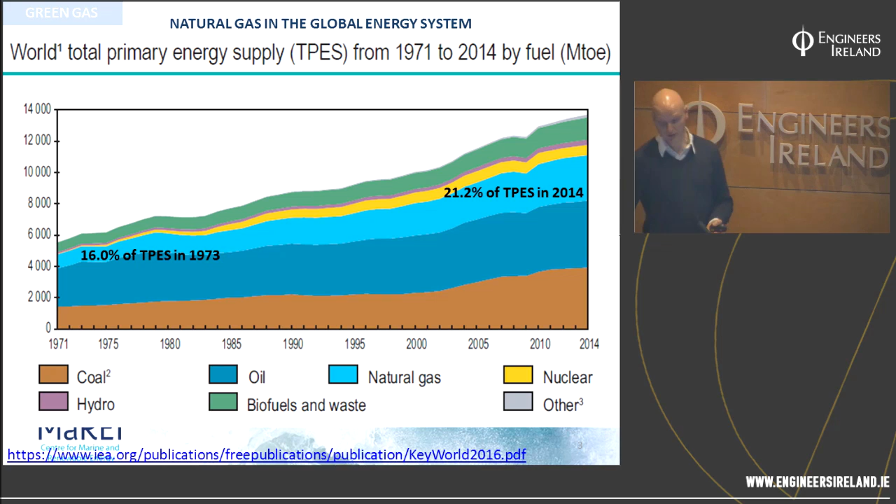So on a very basic level, this is the world's fuel mix, looking at the primary energy supply. We don't see electricity in this - what we see is the fuel that goes towards running the economy from the early 70s to recent times. I've highlighted light blue here, which is the role of natural gas. It's a little bit over a fifth of the energy used globally, and it's projected to increase for a few reasons, which I'll go into.

This is another, maybe more complex but very data-rich, way of looking at the energy system. This is a Sankey diagram produced by the International Energy Agency, the energy research division of the OECD, and it shows on the left side the primary fuels that go into the world's energy system, and what those fuels are used for on the right hand side. It gives a really nice way of visualizing what fuels go where.

One broad brushstroke we can take from this is that a large portion of the world's coal goes towards power generation. If we look at coal here, this is all the world's power plants, and this is what that power gets used for - coal is the number one power generation fuel. Another broad brushstroke is that most of the world's oil, the major portion, goes towards transportation. So it's a nice way of visualizing where natural gas fits into this.

Well, natural gas is the blue line here in the middle.

This is not saying that planet Earth imports natural gas—obviously that's not the case. This is just looking at the breakdown between gas that's produced and consumed within one country, compared to gas that is internationally traded.

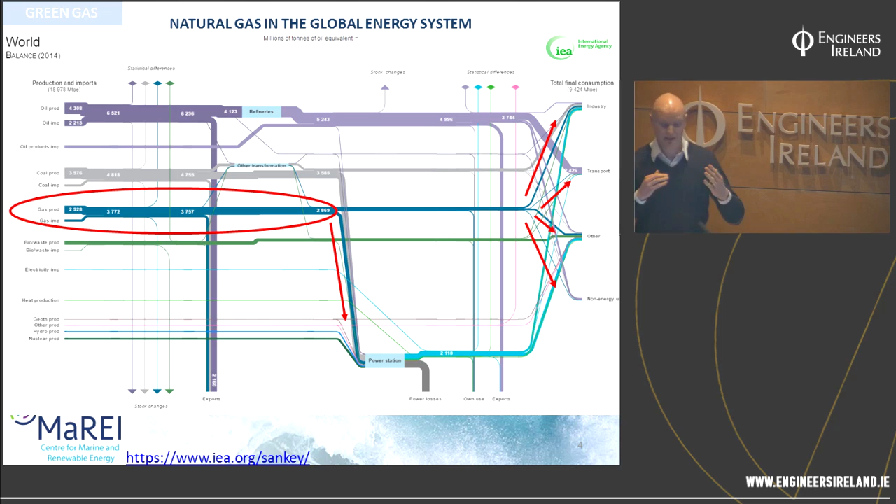And another 40% goes on transportation. So I'd like to differentiate between electrical energy and total energy, and that will come through in my presentation later on.

There has been an increasing use of gas in recent years for a number of reasons. It's increasingly being seen as a low carbon alternative with respect to coal.

Combined cycle power plants, CCGTs, are relatively cheap to build. They're still a large investment, but more of the cost of electricity of a CCGT comes from the fuel than from the building of it, so you can get them built quite reasonably cheaply.

There's been an increase in the diversity of supply of natural gas, which has brought the cost down significantly in the last number of years.

The two main drivers talked about worldwide are the exploitation of shale gas and the increasing use of LNG. In Europe we haven't really embraced shale gas to a large extent.

But there is a large increase in the amount of LNG, or the portion of gas traded that is made up of LNG.

On the technical, engineering side, there is a good complement between natural gas and wind. Gas-based power plants can be operated in certain ways.

They can pick up capacity that may be shed by intermittent renewables, so gas and renewables are seen as being good partners in an electricity system.

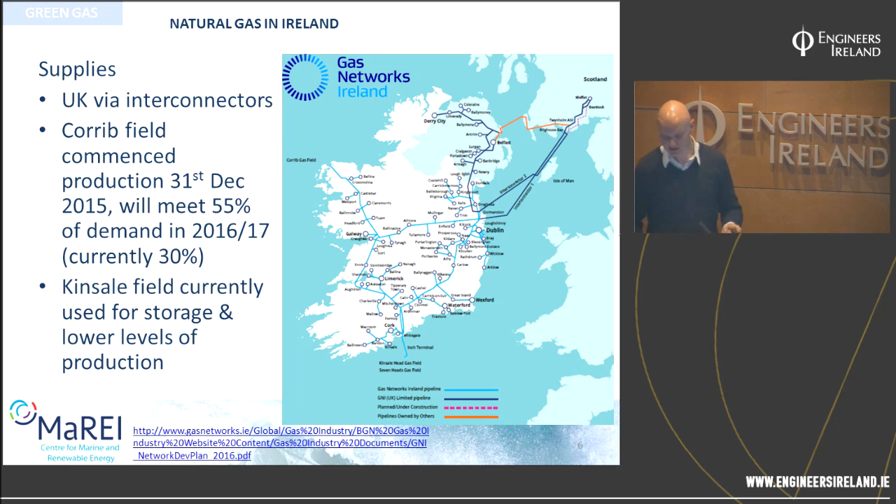It has been used for gas storage over the last number of years, but its use is being wound down now.

How gas is transmitted from the supply side to the demand side is via a transmission and distribution network—very similar terminology to what's used on the electricity network, except instead of voltages, we talk about pressures. There's 2,500 kilometers of high pressure system and about 11,000 kilometers of low pressure systems.

And then once we get into built-up areas, that pressure is reduced down to close to atmospheric pressure.

Another interesting feature, which will be relevant when I talk about projects being funded by the Gas Innovation Group, is the presence of about 50 AGIs.

These are above ground installations, access points into the natural gas network. They'll be particularly of interest for those looking to feed into the network when we start talking about renewable supplies of natural gas.

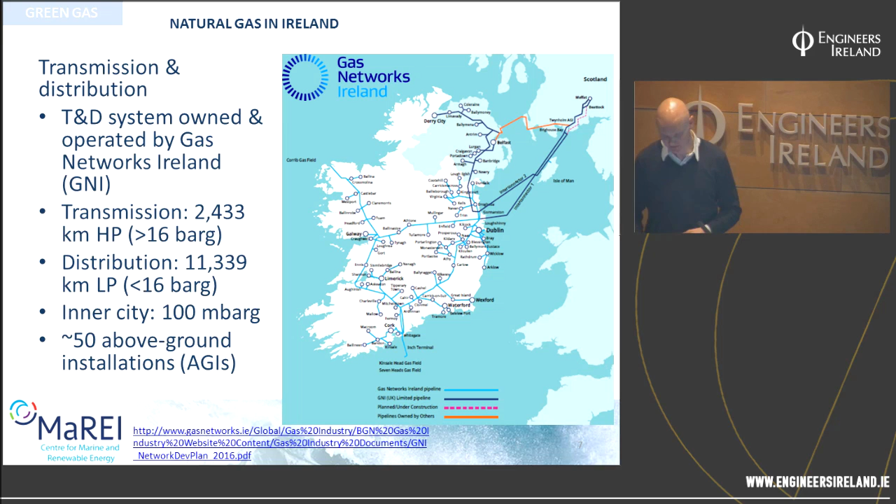On the demand side, world figures show about 21% of primary energy coming from natural gas. In Ireland, we're a little bit more fond of natural gas—it's about 27%.

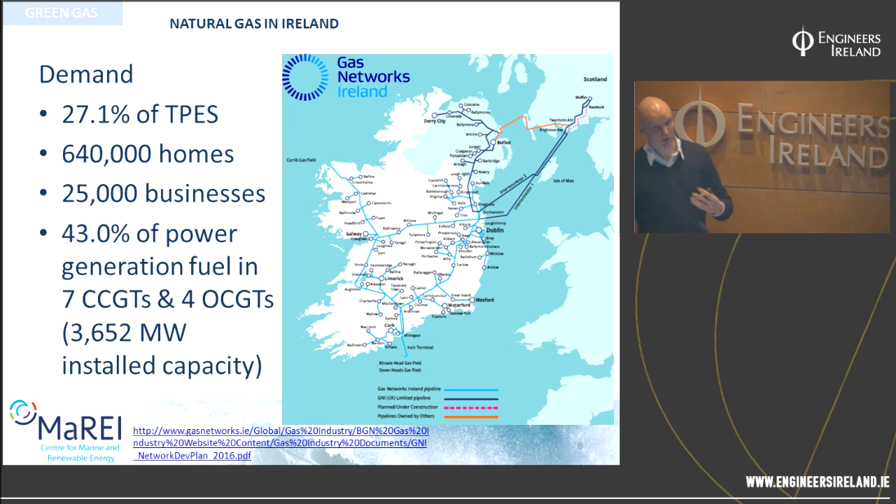640,000 homes, 25,000 businesses - it is the major contributor to power generation in Ireland. This is the installed capacity of natural gas based generation, though this is not operating all the time. There are some open cycle plants which do not have large run hours, but on an energy basis, 43% of

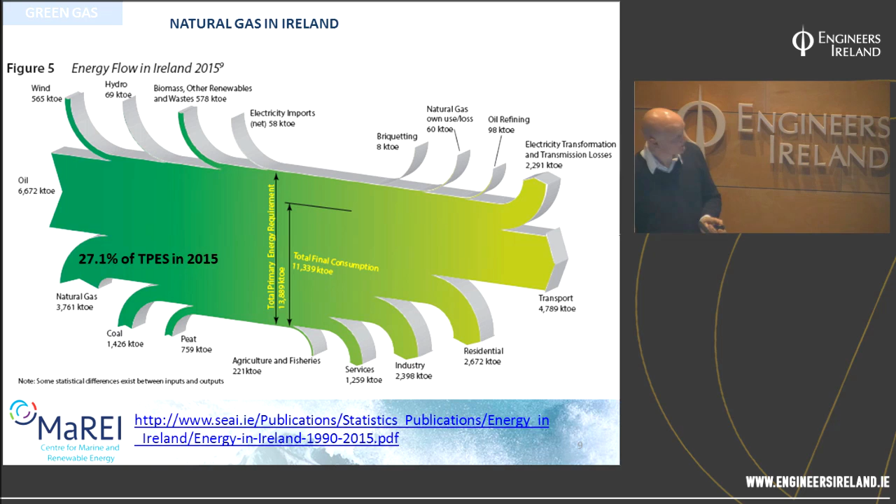the fuel going into power generation is natural gas. This is how gas fits in the overall Irish energy system. There's that 27% of all our resources that come in, so only oil is a bigger contributor. And the Sankey diagram for Ireland shows gas's role in being the major power generation fuel.

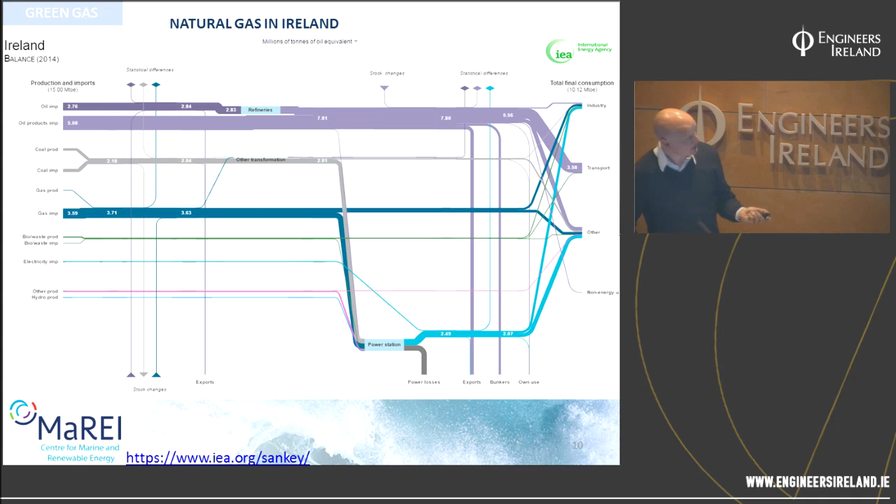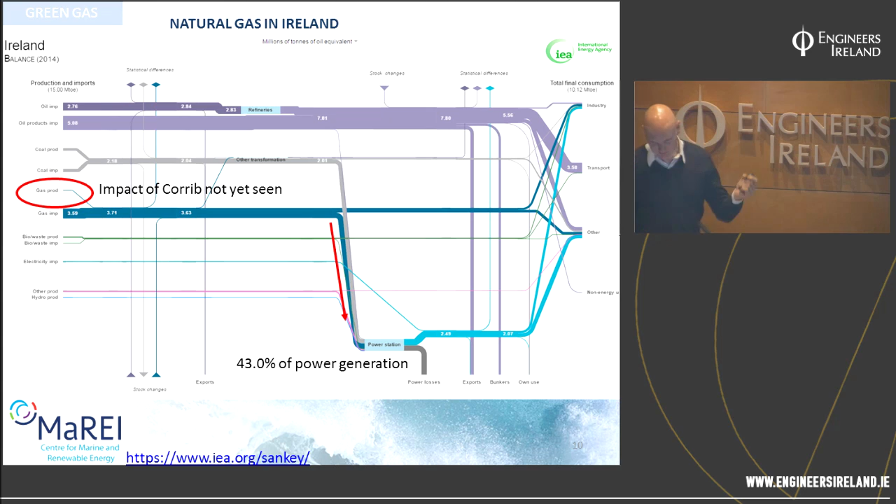In Ireland, we don't currently use any natural gas for transportation, but we're using natural gas across other areas. Sorry, we do use natural gas for transportation in very, very small quantities, but it's not reflected here in this figure.

Those of you who follow the news might have seen about 3 weeks ago that Gas Networks Ireland (GNI) announced plans for a large-scale compressed natural gas filling station network. I thought I'd mention this now, and it will maybe give context to some of the things I'll be talking about later. The overall target is that 20,000 heavy goods vehicles and 12,000 buses will be converted to compressed natural gas.

Now, why would people want to convert to a gas fuel from a liquid fuel? Well, there are a number of reasons. Price volatility is more significant for oil products than it is for natural gas. There's been a significant decoupling in recent years of the cost of natural gas from the cost of oil, which were always traditionally linked. But there are less emissions.

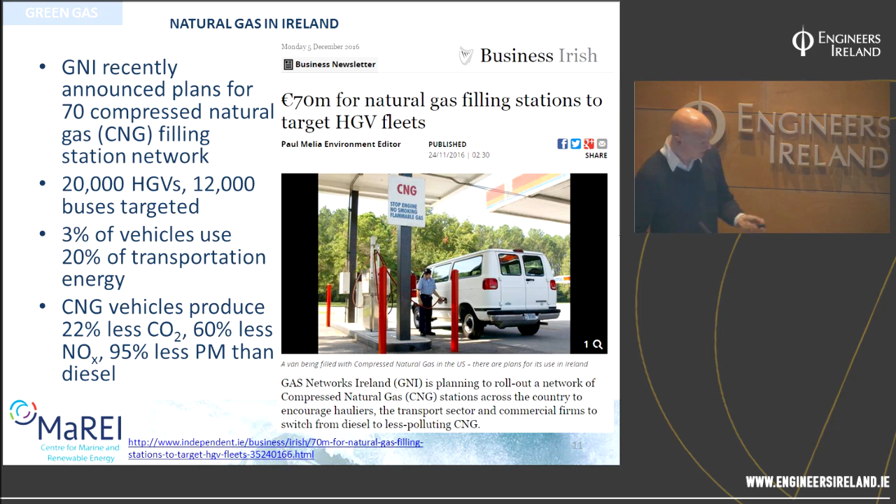There's lower emissions, so maybe not as much of a drop in CO2 as some people may expect, but there are significantly less atmospheric pollutants that do harm to human health associated with natural gas compared to diesel. NOx are smog-forming and respiratory-attacking pollutants, and PM is particulate emissions. You can almost eliminate particulate emissions by using natural gas.

In order to address a number of challenges facing the natural gas network, the CER set up an organisation called the Gas Innovation Group, which is chaired by Gas Networks Ireland. Some of the challenges facing the natural gas suppliers was that even though a large amount of natural gas is being used to provide fuel for the electricity system, an increase in renewables has actually caused a slight decrease in the demand for natural gas in recent years.

Gas Networks Ireland, being in the business of transmitting gas, is interested in finding ways to address that. There's the emissions reduction issue - we don't really use natural gas for transportation in Ireland now, and we can see that there are major environmental benefits of shifting from some of the dirtier fossil fuels to natural gas, which would be the cleanest fossil fuel.

It also matches well with renewable energy on two fronts. It's a good complement to existing renewable electricity sources, but the natural gas grid can also be a delivery system for renewable energy through technologies such as anaerobic digestion, where you can produce methane from a renewable source and inject it directly into the grid. This would be a way of making progress towards some of our renewable energy targets, which I'll show later on.

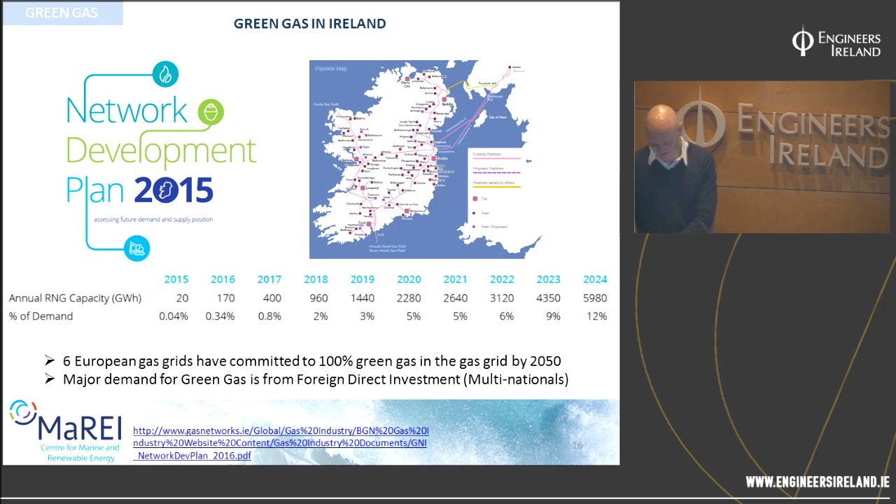So it's data centers—they've got heating, cooling, and power requirements. Gas Networks Ireland are very much interested in trying to get organisations like Apple, and types of sites like data centres, on board and pushing the demand for renewable gas. There are other examples I could go into, but certainly for the west of Ireland, Athenry is the focus. Now, there are other reasons why this site's development is being held up—it's not only the renewables, but that's a different story, and not just an engineering issue.

In terms of why people would use the gas grid as a delivery system for renewable energy, I'd like to present some rough numbers produced by Jerry Murphy in UCC, in a piece he wrote for the Engineers Journal last year. If we break down energy use very roughly into electricity, heating, and transport, you see this 20-40-40 breakdown roughly.

In order to reach our European 2020 targets, known as the 20-20-20 targets, the European Union as a whole has to have 20% of its energy coming from renewable resources by 2020, reduce carbon emissions by 20%, and increase energy efficiency above a baseline by 20%. So that's called the 20-20-20.

Ireland's specific target within that European target is 16% renewable energy by 2020. This is the breakdown Ireland has chosen to pursue: 40% renewables in the electricity sector, and 12 and 10 in the heat and transport sectors. This is how they play out in the overall energy mix.

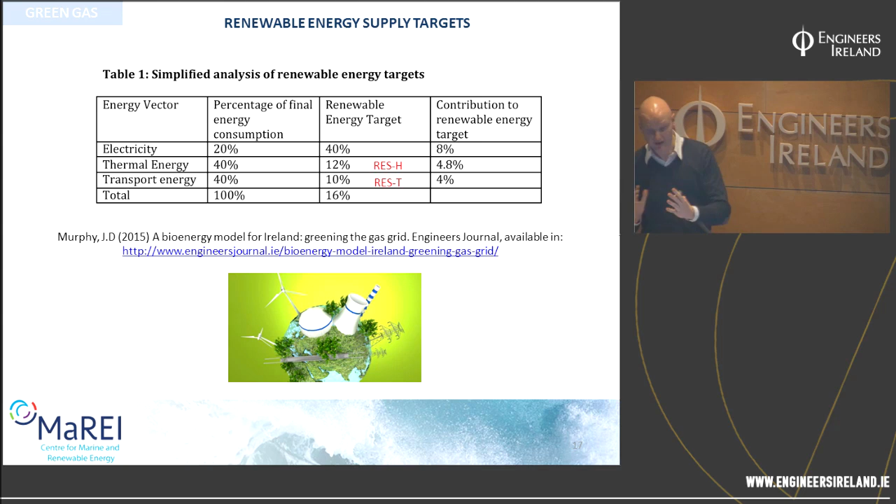So we see the gas grid as being a potential way to do that.

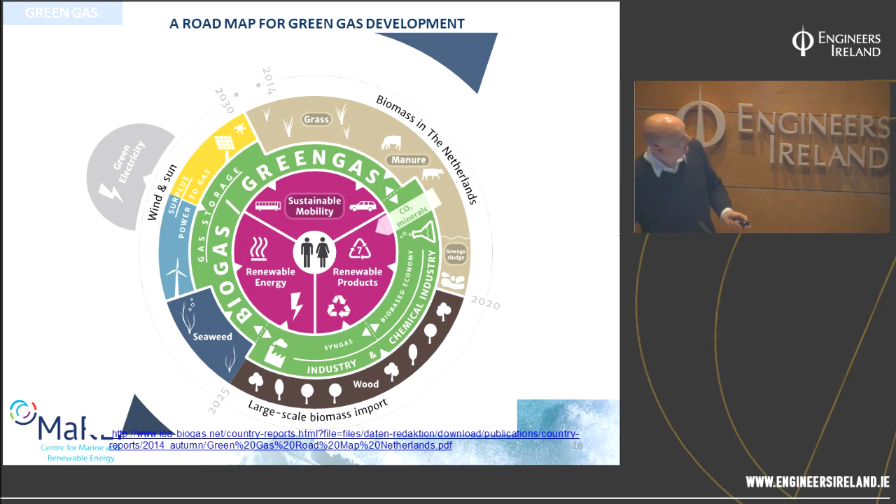Now, this is quite busy, but I'll try to explain it. This has been produced by the International Energy Agency for the Netherlands, who are one of the leaders in the use of renewable natural gas, or green gas. This shows, starting now basically, what technologies and resources can be used practically to provide renewable methane onto the gas grid.

So anaerobic digestion processes that use grass or manures are well-established technologies, and with the right incentives they can start supplying gas to the grid now, and in many cases they already are. Germany and Denmark have large portions of anaerobic digestion on their grids.

Going then, sewage sludge is maybe more of a topic currently under investigation. It's being done at some wastewater treatment plants, where energy is recovered, but it's not being injected into the natural gas network—it's being used to generate power on site.

Going into the future, into these more emerging technologies, we're looking at using harder to break down feedstocks—harder, woodier, more contaminated feedstocks, which would not be suitable for anaerobic digestion, a biological process. These would be more suitable to something like gasification, a process not a million miles away from combustion in terms of the conditions encountered.

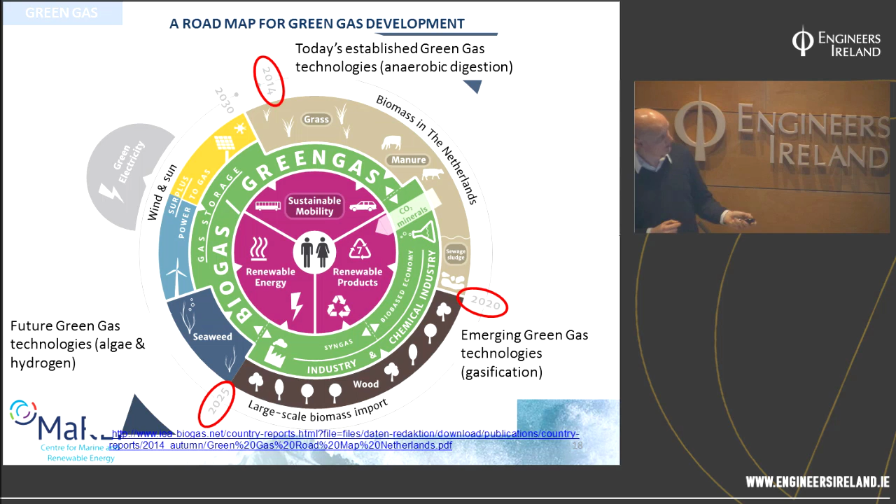We can start to imagine a system where you have the natural gas grid and the electricity grid combined through the use of hydrogen, using that hydrogen to produce renewable methane. I've got a schematic of what such a system might look like later on. But anaerobic digestion is a more well-developed technology for biomethane production than gasification. So let's look at what some of these technologies are.

Essentially, anaerobic digestion is taking a wet biomaterial, a substrate, and adding what I'll call bugs to it, left in an oxygen-deficient environment. What happens is a breakdown of that biological material into a series of gases. One of the key steps is the conversion of volatile fatty acids into methane.

That methane comes out as a mixture of 50-50 methane and carbon dioxide, with a little bit of cleaning up. That can be injected into the gas grid, or used as a vehicle fuel.

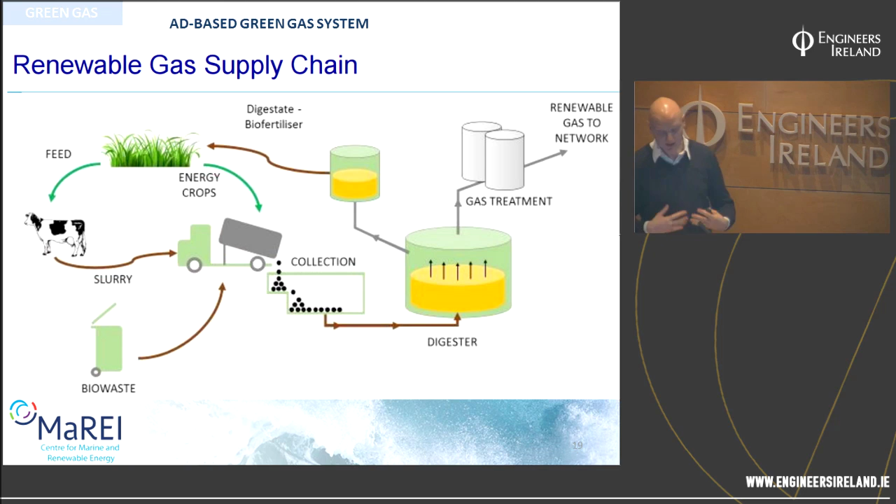The other thing that comes out of it is digestate, a solid material which, depending on the feedstock originally put in, can be used for fertilizer or soil improvement. So it's a way of closing some of the loops within the agricultural sector.

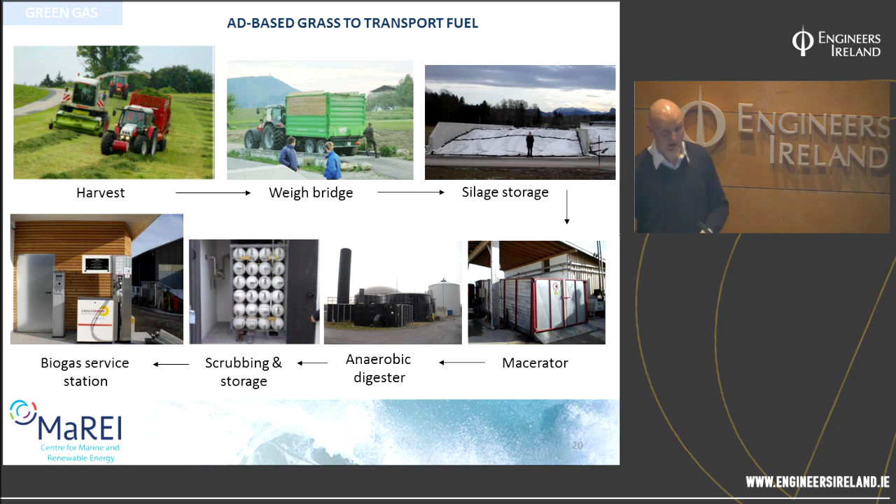This is an example of a grass-based anaerobic digestion fuel production system in Austria. This is not funded by the Gas Innovation Group, but it's an indication of what is possible with anaerobic digestion. We have the harvesting, the digestion, storage, the cleaning and storage, and then eventually this is used to run some of the local transportation systems. So it's a nice closed loop.

What the Gas Innovation Group has been funding is performing resource studies in Ireland. This is work performed within MaREI, specifically at UCC, where the spatially resolved resource for a large number of feedstocks suitable for anaerobic digestion can be studied.

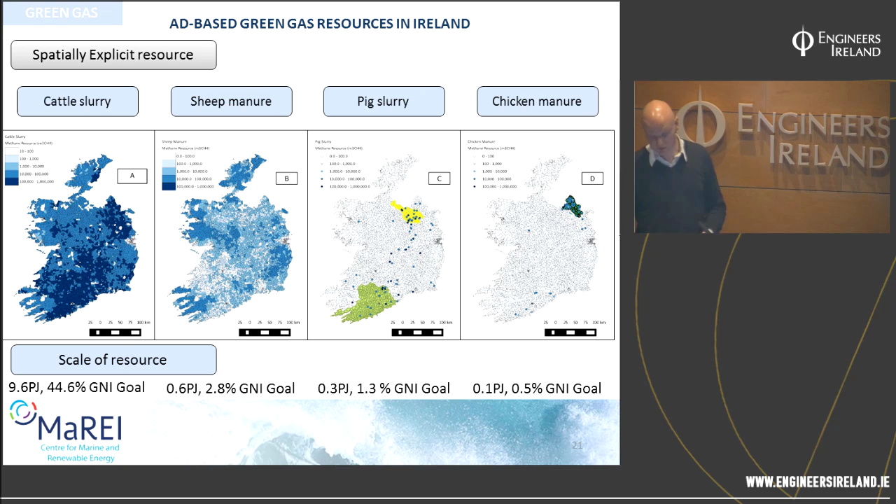Now, you're never going to get all of that slurry because a lot of it is on the field. It's not practical to get. Some of it's going to be too far from the gas grid. But this gives a first indication of how much of that resource there is. This work was funded to look at a number of other feedstocks as well, which you can see there, and some further studies done here.

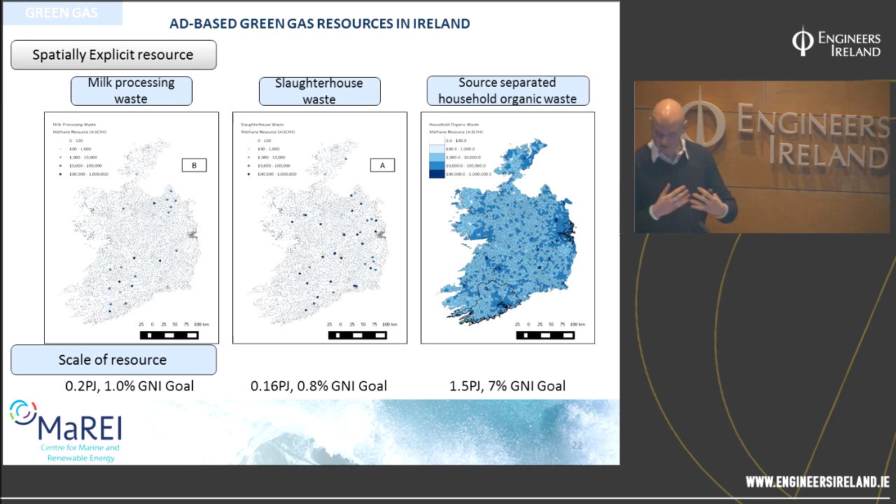Another interesting one here is looking at household separated organic waste, which I'll look at in a little more detail. This one is interesting because where you have houses, you have organic waste, and where you have houses, you have energy demand. So there's potentially a good link between those two.

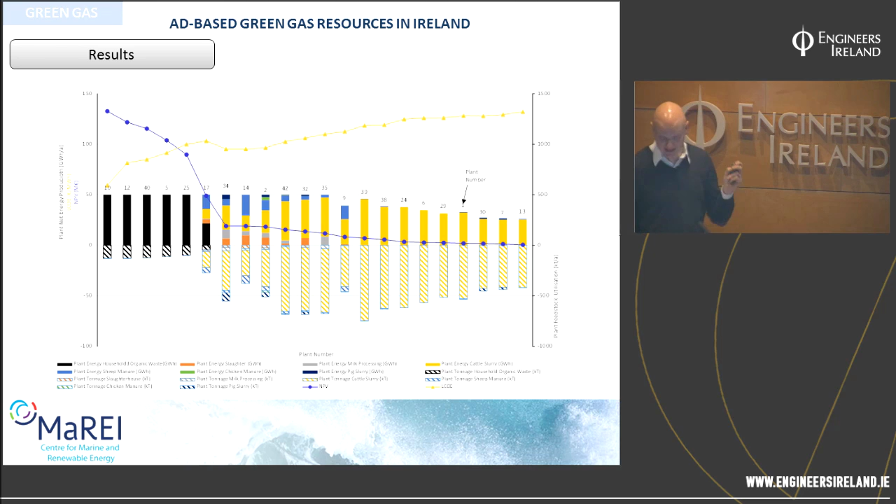The first sites on the left have the highest net present value, the most potentially profitable sites. They're all operated using household waste. As we get into the lower net present value ones, this is looking at more slurries and grasses. But the first ones are sites that use organic waste, and they've got a high net present value according to the study. Most of them are based in the greater Dublin region, which makes sense—there's good agricultural land outside Dublin and high energy demand inside Dublin.

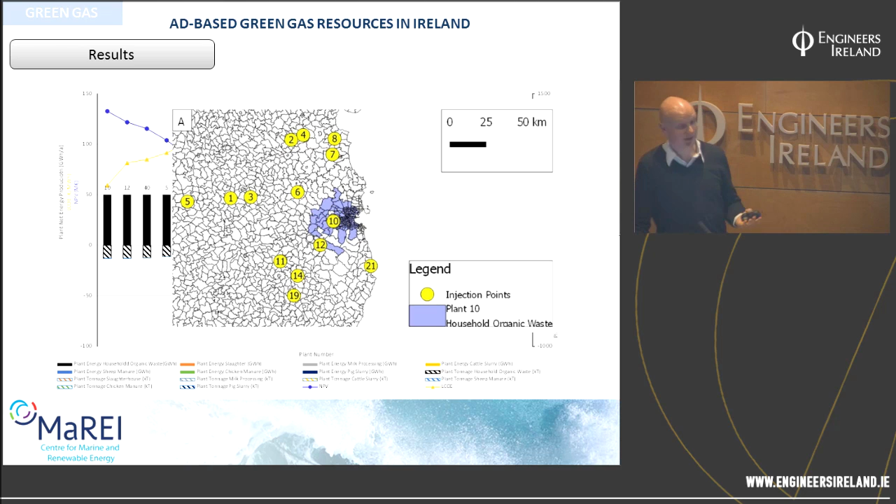So this is where the work is at with the anaerobic digestion resource studies, looking at different types of feedstocks. Feedstocks that would not be suitable for anaerobic digestion, which don't have the high moisture content required, are better suited for gasification. This is work that I'm leading in Galway.

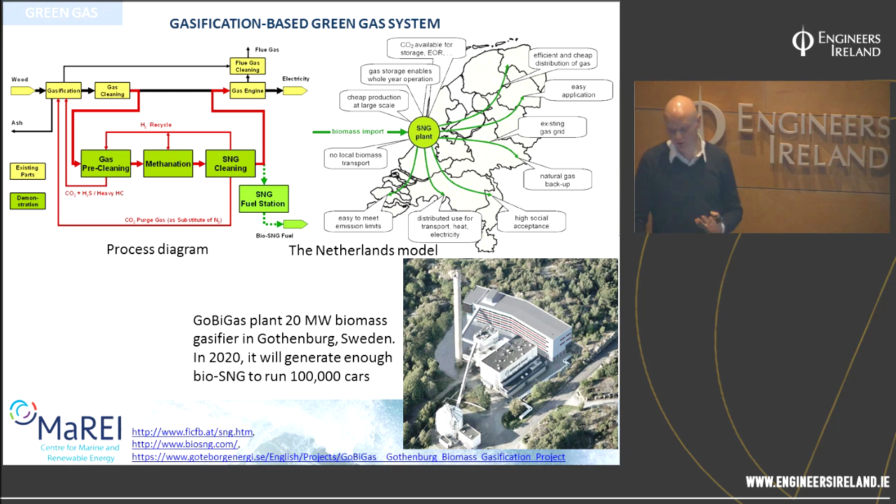Now, Sweden is a very heavily forested country, and wood is the ideal source of fuel for a gasifier. We don't have as much wood in Ireland, so we started doing a similar study looking at what types of resource we have available in Ireland.

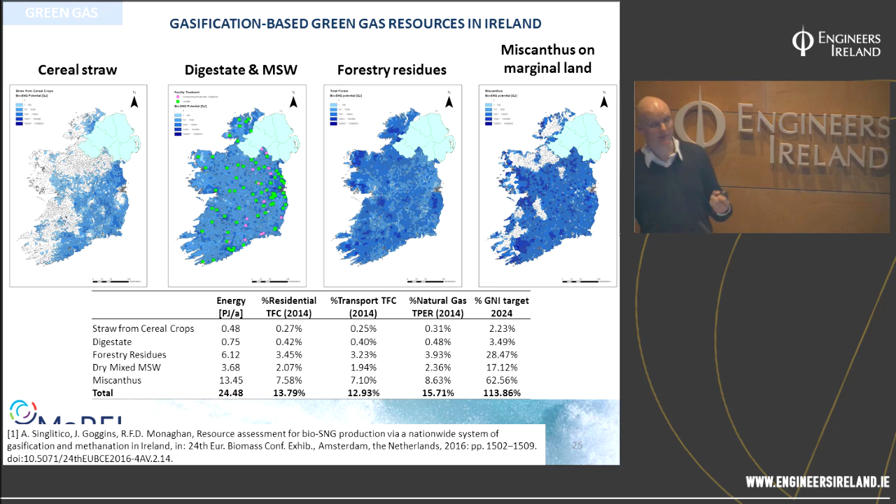And the resources we looked at were cereal straw, leftovers, looking at the outputs of digestate that would not be suitable for spreading on land, and the black bin waste, residues from forestry, from Coillte, from private forests, and looking as well at the use of low-value agricultural land, so what's called marginal land. Now that's a difficult definition to pin down, but you can grow energy crops such as miscanthus on low-value land without really offsetting too much agricultural activity that's going on. So when we sum all these up, we can make some comparisons to the Gas Networks Ireland 2024 targets, and we can see that some of these do start to make significant dents into that target value.

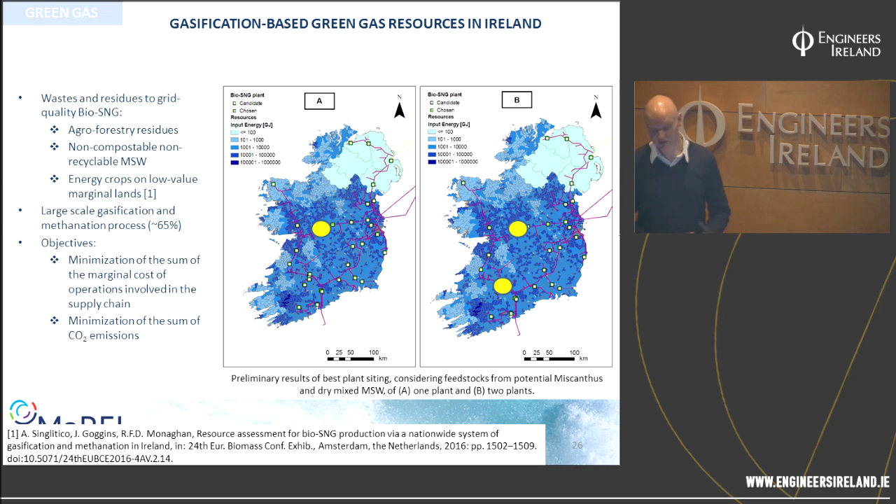So what the current state of this research is now looking at is where are the optimal locations for these gasification sites. A lot of the gasification resource would be in areas that are not particularly near a natural gas connection. So how do we design a system that gets the raw resource to the gas grid, and how do we do that in the most efficient and most environmentally sensible way.

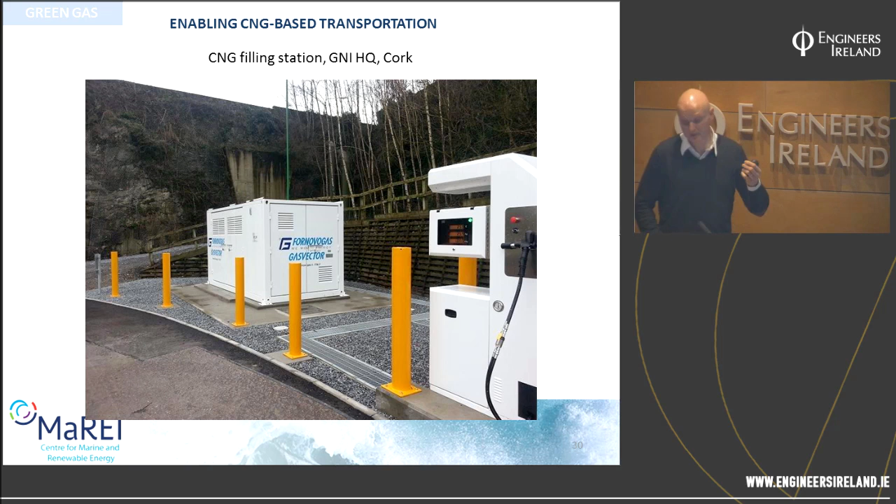This was also funded by the Gas Innovation Group, and the idea is that these will form the backbone of this conversion to natural gas fueled transportation.

There's a groundbreaking at the Clean Ireland recycling facility in County Clare, where they're putting in a fast fill CNG station. There's fast fill and slow fill, much like with electric vehicle charging. Fast fill, you'll fill your tank in 5 or so minutes; slow fill, maybe 3 to 5 hours. So there'll be a fast fill one going in here in County Clare.

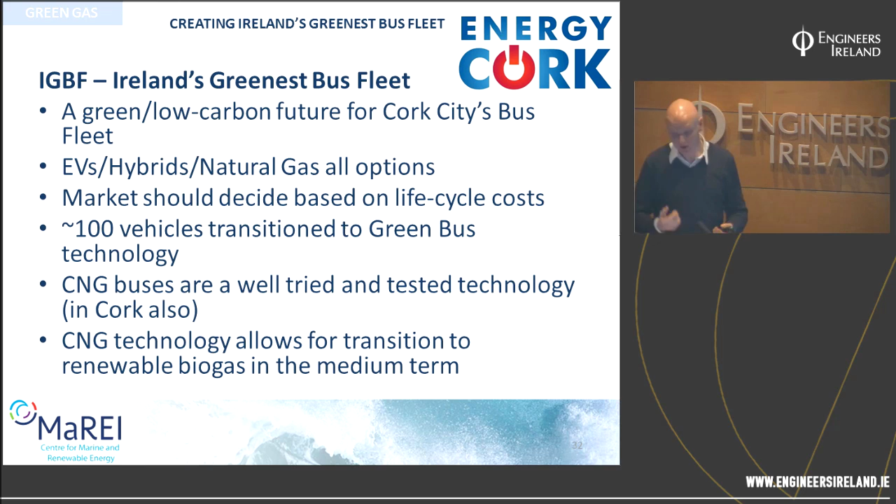So what the Gas Innovation Group helped fund was a temporary CNG filling station at the Capwell depot in Cork, and there's currently investigations ongoing to put in a fast fill permanent station at the same site that would enable a constant presence for natural gas fueled transportation in Cork. But in terms of using gas for public transportation, this is the most developed project ongoing in Ireland at the moment.

And what all of this is building up to is this Causeway project. Gas Networks Ireland was recently awarded funding from the European Infrastructural Network Fund to commence the first stage of this nationwide CNG filling station network. The initial plan is to have 14 filling stations along the key motorway routes from Dublin to the border, Dublin-Limerick, and Dublin-Cork.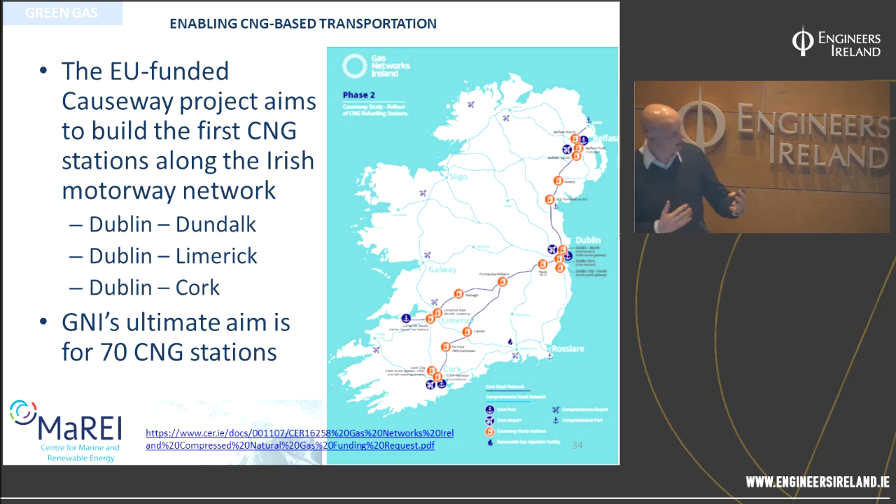This is being funded, and there's also a research element to this. The key research element is how the natural gas grid responds to increases in demand at various points along the system which may not have had demand before. So this is the first stage of the rollout of the CNG filling station project.

Now there is no hydrogen infrastructure right now, and there's not really a plan to have one. But the useful thing about having hydrogen is that it can be used to upgrade biogas — the gas from biomass produced from gasification and anaerobic digestion — to produce pure methane at very high efficiency. This will enable an integrated electrical, heat, and transport energy system, with hydrogen serving as a buffer between the two.

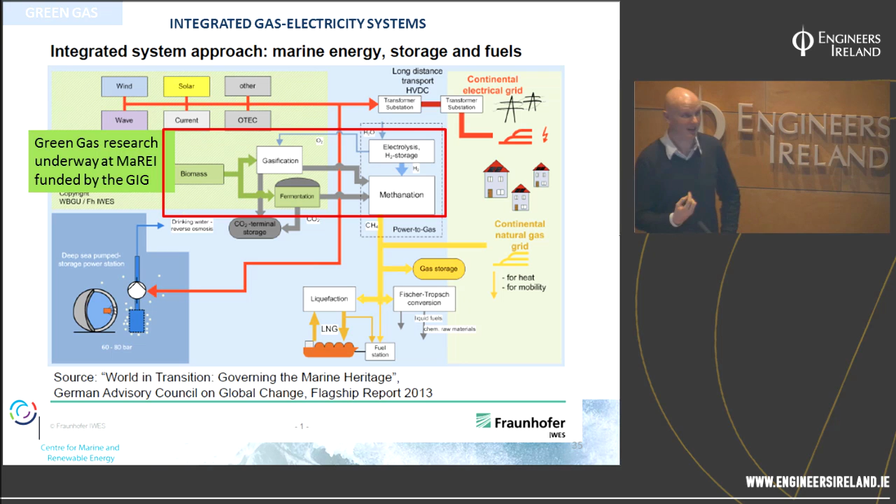I guess what I'm saying is that I don't view the wholesale use of bioenergy purely for power generation as really playing to bioenergy's strengths. From a carbon capture and storage point of view, it possibly works, but I think that having bioenergy solely generate electricity, you're trying to beat wind and solar at their own game. They make electricity directly. But it's dispatchable, so that's the big difference.

It is. Maybe there'll be ways around the dispatchability in the future with different types of energy storage, but I think there's a key selling point with bioresources that have got this energy density that the electrical options just don't have yet. So I do think there is a role for it in the transportation application, but I completely take your point about the carbon capture and storage. Yeah.

My name is Ramachandran, call me Ram for short. I'm from Engineers Ireland here.

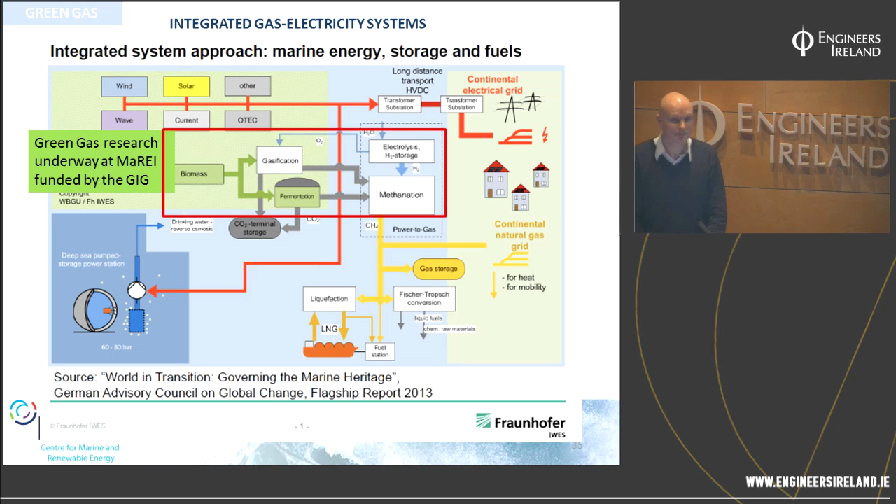My question is, if you're going to inject the gas from biogas into the grid, the grid gas is almost 95% methane. But the biogas you get is maybe 60%. How are you going to make it match that?

That's the purpose of this funded project. The big step for anaerobic digestion to go onto the gas grid is this cleanup process. We just can't put biogas directly onto the grid. The carbon dioxide needs to be removed, and the sulfur, and the water. So no, we're absolutely not proposing to put raw biogas on the grid, not even slightly upgraded. We're talking about bringing it almost to 100% methane, and that's what the funding for this particular project was about - to fund the gas cleanup.

I was looking for some funding from somebody else, SEAI. They told me to wait until January. What I was trying to do - you showed me something, that demonstration, showing the gas. But what I was going to do was put a small generator and a gas cooker, so I'll produce the same gas, use some for cooking and use a generator for producing electricity. I was going to do this in 1996. I didn't get enough funding for it, because I was going to do it for the farmers in the farm, with the cattle. But you already mentioned that in Ireland, the farmers don't keep the cattle in the shed in the summer.

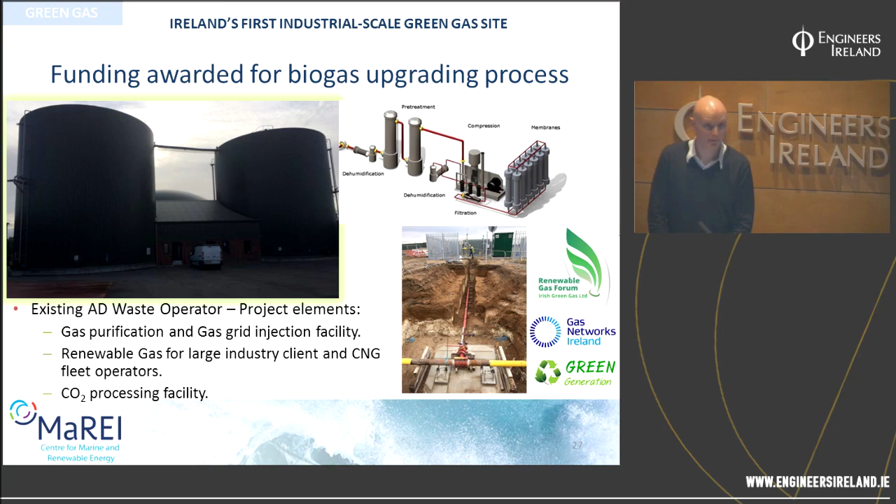So I came up with the idea of using solar panels and biogas mixed together, so it will balance out the production, 50-50. I guess that's maybe pioneering the integration of renewables with biogas, connecting to the grid also. The grid is good for you because you don't have to do the load balancing.

But they used to pay 15 cents before, now they pay 9, they might pay nothing in the end. Well, if it's me giving you the money, I'll tell you, well, I'm doing the load balancing for you, so I won't pay you anything. So this could happen.

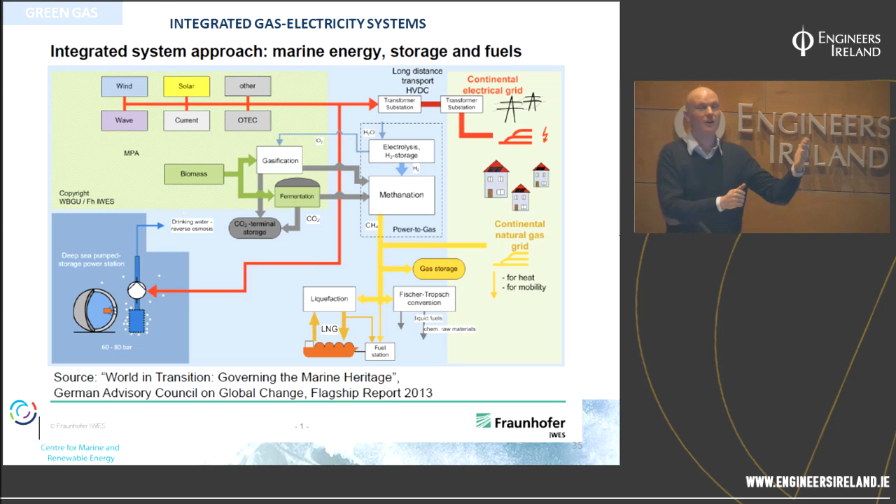I know that some of the research in Cork has looked at how far in advance you would need to add more slurry into an AD in order for it to match the load required of the gas grid. So they're looking at predicting peaks in gas demand, and maybe 3 or 4 hours before that demand, starting to load your slurry in and getting the bugs working. So there's work in these predictive models in that area - it's an interesting perspective.

Thanks very much, Rory. Stephen Moran from Fingleton White. Just 2 quick questions for you.

In relation to the HGVs, is there a requirement for dual fuel running on the vehicles, say running diesel at startup but then switching over, or is it 100% gas? And the second question - do you know if there are any plans to incentivise CNG for private vehicles?

I'll short circuit the second one and say I don't know. For the first question, my understanding is the funding is available for both dual fuel and CNG only. There are obviously pros and cons with both. With dual fuel, there's always going to be some redundancy, with one tank not being fully used or the other, but then it can use a second fuel source. So yeah, both are being investigated by Gas Innovation Group funded projects.

Thanks very much. Rory, Donald Kissan, Gas Networks Ireland. I'd like to congratulate you on a very good presentation. So I have a question and maybe a comment on Barry's question - I'll predicate it by saying I'm a mechanical engineer.